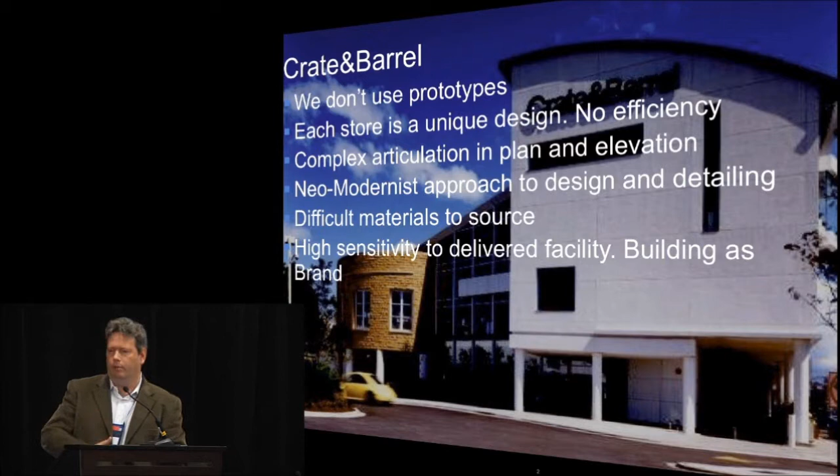A little bit about how we build. If you looked at us as retailers, we probably have the most bizarre way of building buildings. We don't use prototypes. Every building is completely unique. Most of that's due to the real estate that we get from developers. Hard good retailers like us don't generate a lot of rent compared to apparel or electronics. So they tend to give us the vestiges of leftover land in malls, and we have to make them work. You know, sow's ears into silk purses. It's very hard. Each building is sort of inefficient in that respect compared to a Walmart or a Target where you can repeat buildings and make them more efficient.

They're also very articulated. We like buildings that are very dynamic, very gestural. We think it complements the merchandise that we sell and creates an iconic building in the area that we're placing it. They're also very neo-modern. They don't have a lot of moldings. They have a lot of reveals. That's very hard to build because molding hides a lot of error. We have a lot of reveals that express error sometimes.

And they're very difficult materials to source for us. We use custom stone. We use special wood that comes out of British Columbia. We use wood that comes out of New Zealand. So sometimes just getting the bulk of the material to the project site is probably our hardest effort.

And our employees and our ownership are very, very sensitive to the building. They consider the building as a marquee to the brand. We have people at Crate that feel you should be able to take the sign off the building, and customers will still recognize the building as a Crate and Barrel building. I'm not sure I always agree with that, but it shows the level to which we take pride in our facilities. I'll show you a couple of pictures.

We do a lot of 2-story buildings. You'll see a lot of angles, a lot of curtain wall. We've done some historic adaptations in New York City, Boston, and San Francisco that require a very different sort of expression.

This is our only concrete building, built in 2000 in Tyson's Corner. We learned a big lesson from concrete, which is it's not very forgiving. And in retail, we like to change our minds a lot, we're like squirrels crossing the road. So we decided to go back to steel, and since then we've only built out of steel.

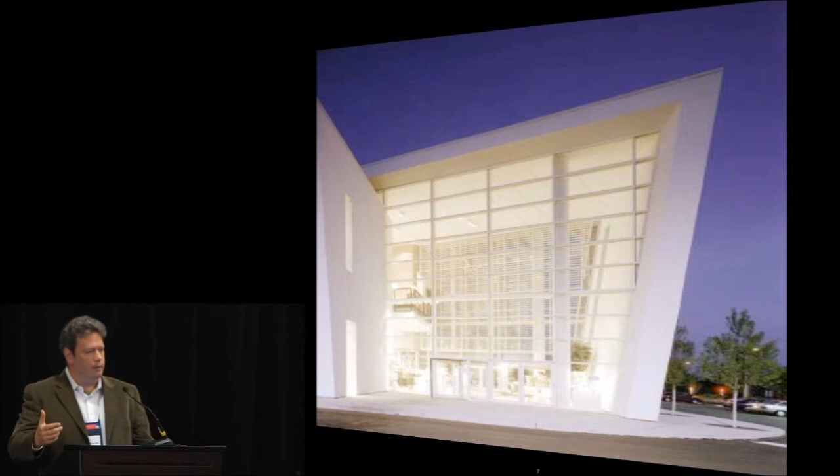Another thing that's unique about us is the amount of light that we use. We have over a mile of track lighting in every Crate and Barrel, and we burn over 1,000 lamps in that track, and we move them around constantly. It's like a little theater inside the store because we refresh the product 4 times a year. We move it around; it's not a static operation like a drugstore or grocery store. So we need a facility with a lot of light, a lot of theater.

That creates a lot of heat. Lighting in a typical building is about 20% of your heat load. In a Crate and Barrel, it's 60%. So we have the lighting system and the mechanical system actually of a small museum.

And that has a huge impact on structure, because structure's coming down, ceilings are going up, so the coordination of everything above the ceiling is tremendously complicated for us. And we just sell spoons and sofas, we're not a museum. So we have economic pressures to do this very efficiently.

To be honest, in the boom years, what we call the golden age, from about the mid-90s until 2008, we could afford to do this. We didn't have to watch our pro forma budgets too carefully. Most retailers were making very good money during those times.

But after Lehman Brothers, we sort of woke up wearing our own barrel, like a lot of us, and we had to rethink things. We were acquired in the mid-90s to early 2000s by a European company out of Hamburg, and they looked at our P&L and our bottom line in late 2008, the end of the golden age, and they said, 'ein Minuten bitte.'

Things are looking not so good, and we're going to give you a survival mandate. So at the beginning of 2009, they said, Crate and Barrel needs to keep growing, it's your main revenue stream for growth, but you can't build buildings like you used to in terms of how you put them together and how you've spent money. In fact, you need to spend 30 to 50% less on a building, and you need to get it to market in about 45% less time because you're taking too long. So they're too expensive and they're too long, but we love the way they look, so keep the same look. And we said, okay.

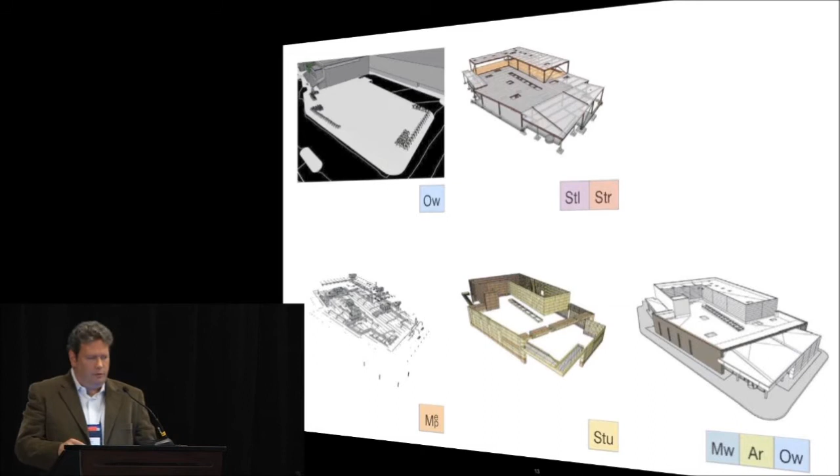And really started leveraging the use of models. This is a current example of stores we're doing now from 2010, in Pittsburgh. Essentially everything's modeled, and I'll show you why in a minute. We've got a design build model at the upper right for concrete, steel, deck. Civil engineering and landscape models at the upper left, MEP models at the lower left, prefabricated walls in the middle, and what we call a design intent model at the lower right. We did this because we realized from about 2000 forward that there was value in modeling.

Modeling prevented error. It prevented our error. That was the first thing we realized, was that when we modeled things as the designers of the store, we caught error. We caught things we didn't realize. It was much better than catching it in the field later and spending hundreds of thousands of dollars to correct the design intent. So we were strong believers in modeling to catch errors in design intent.

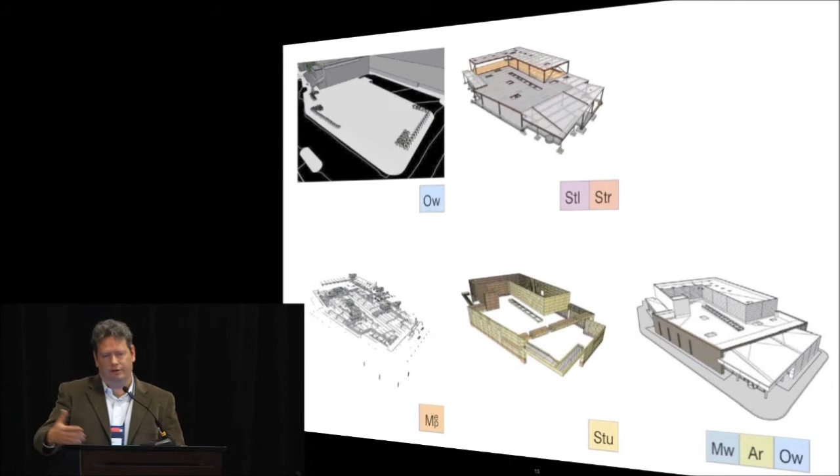We started telegraphing that into construction. Our best example today has been structure.

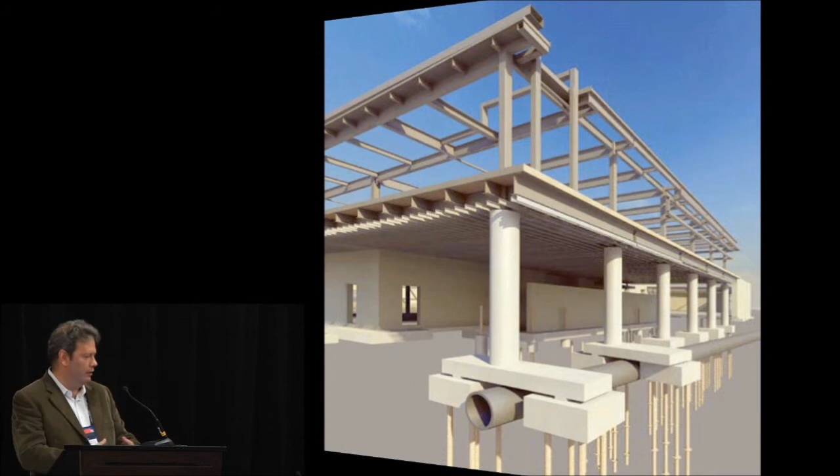This is maybe an over-rendered picture of common structure for us on a building. You can see the level of detail is probably about an LOD of 300, approaching 400. This is the fabricator's model and the engineer's model superimposed. They work together in Tekla. They've modeled the structure and part of the foundations, and an existing condition we had to span over, which was a 36-inch sewer pipe. Moving it would have really broken the deal, so we had to create a novel little solution to span over it.

The level of detail that our models have hit now at the design levels is pretty interesting. We realized we were losing value, spending extra money putting in detail late in phase. If you look at this example, you can see the gusset plate at the lateral load brace, upper left. That impacts us sometimes, and the gusset plate's not shown in the engineering model. It's shown in the fabricator's model, but we may not catch that. In this case, there was a curtain wall window projected for that corner. We would have missed the gusset plate in design, but since we're using a very high level of design definition early in our design process, we're able to catch it.

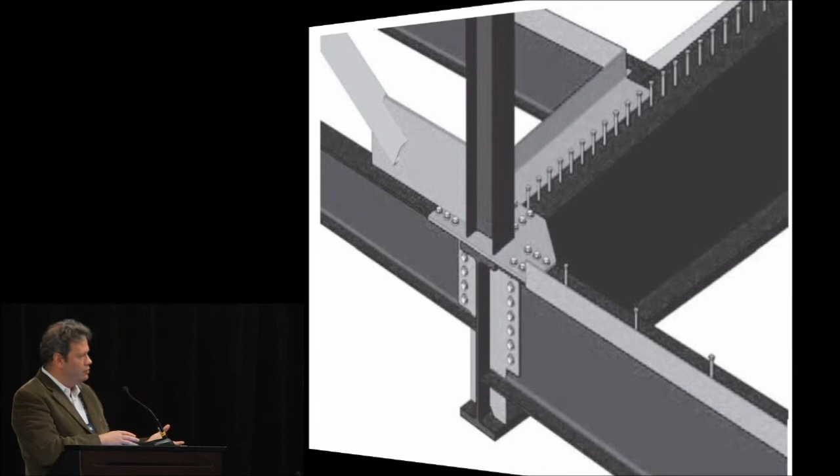So you had to find engineers that would use Tekla at a fabrication level of detail early on. That's kind of tricky to do, but it's been very, very successful for us. The savings is that with the right partnership of engineers and fabricators, you're not duplicating model time. What we realized in '06 and '07 was that we had an engineer doing great work in Revit, very good modeling, but it wasn't interoperable with Tekla. So the detailer was having to start all over again in Tekla, and that was about a $50,000 cost to us. Over time, we were able to knit together the structural engineer and the fabricator so that there's not that $50,000 cost of remodeling into Tekla. It's all seamless.

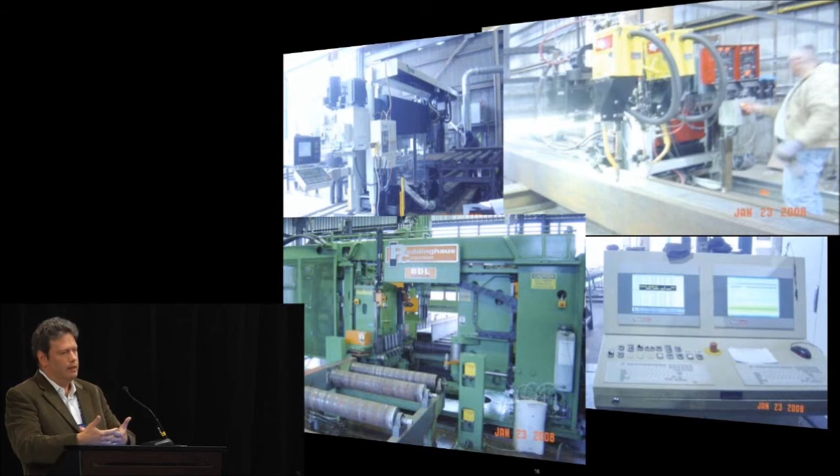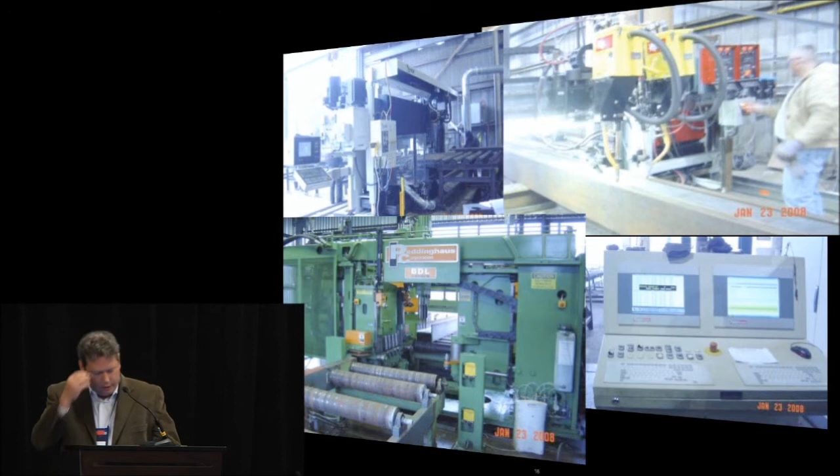We also learned a lot through our relationship with one fabricator in North Carolina about how steel is not only modeled and shown to us in drawings and views, but how it's fabricated. This was very interesting to us as an owner, as a retail owner, because we saw the potential for a lot of waste. We started to understand that despite these pictures and what you see, steel fabrication has a lot of manual process to it.

Adding clips and angles is done by welders on the shop floor. And when you change something, the risk of them getting the wrong information at the wrong time is extremely high.

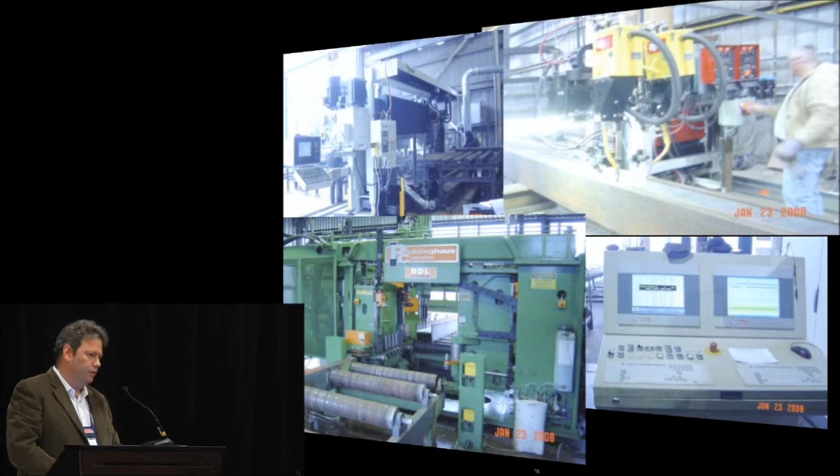We actually took all of our project managers at Crate, all of our internal architects at Crate, and our outside architects and engineers, and over about 10 trips to Charlotte, walked these lines and understood how steel flows from the flatbed rail car to the truck after it's been primed. And really developed not only a respect for it, but an understanding of when we can save time without spending additional money.

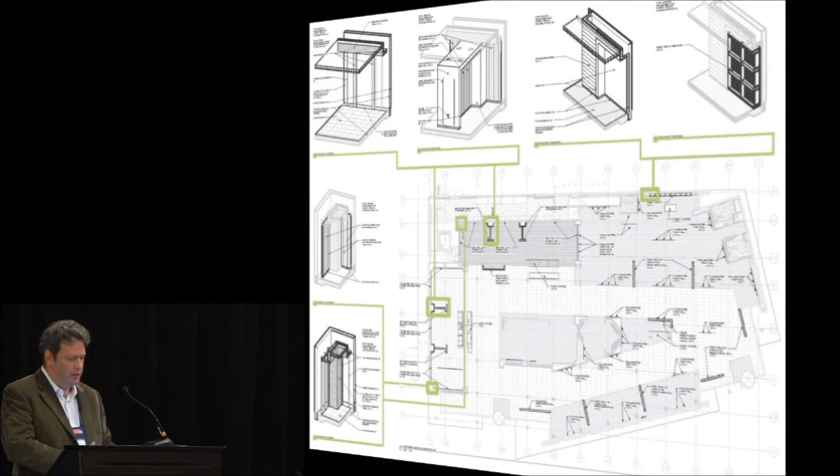So we learned a lot in our experience with Tekla and steel, which really started in about 2003, dabbling, and we kicked it into high gear in '08. Learned a lot and developed a lot of confidence with models.

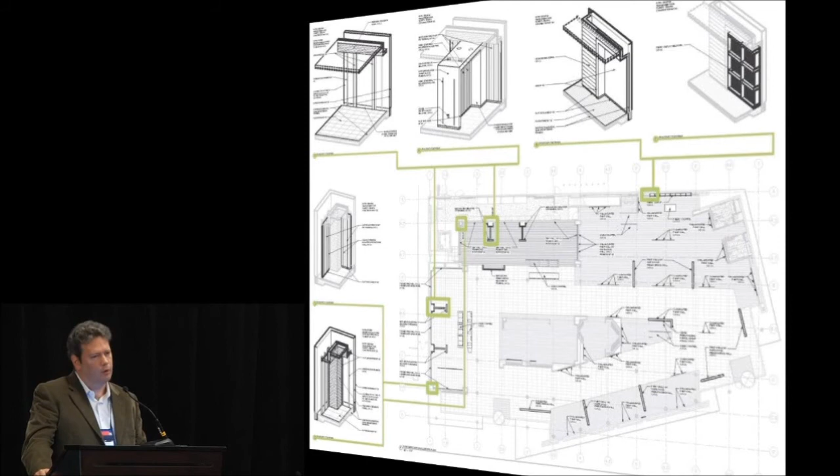We took this confidence into other areas like drywall, and these are drawings of our interior store fixtures that for 30 years have been built out of some tube steel provided by Division 5, some drywall studs and drywall provided by Division 9, and finished carpentry provided by Division 6. So you have three major subtrades all working on site to build this fairly small little wall.

We realized, well, if we can build structural frames with very little error anymore using the Tekla approach, why can't we do the same with interior drywall? And we started pulling these parts of the building out and designed them very, very accurately with this nuts and bolts approach that we've seen Tekla detailers do, and turn them into fixtures.

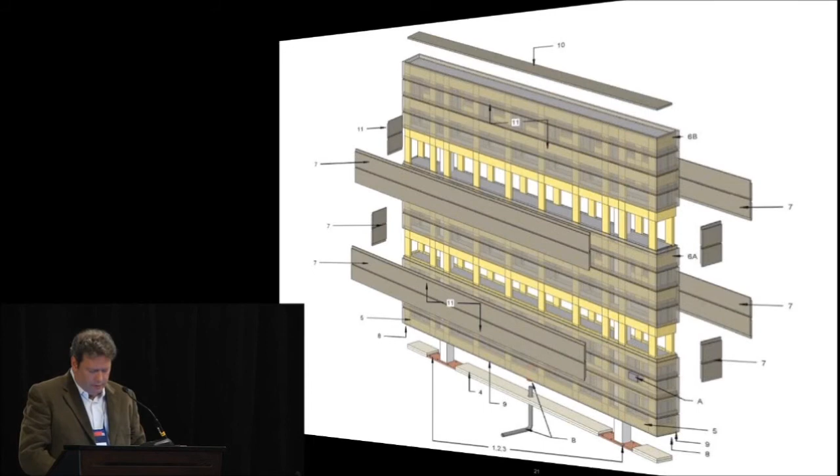So this is just sort of stick built construction like you would see in this room, but we found fabricators who were used to building cosmetics cases and display cases for other retailers, and we asked them just to build walls for us, but use this level of detailing, right down to the screw, and actually designed prefabricated modular electrical systems as well.

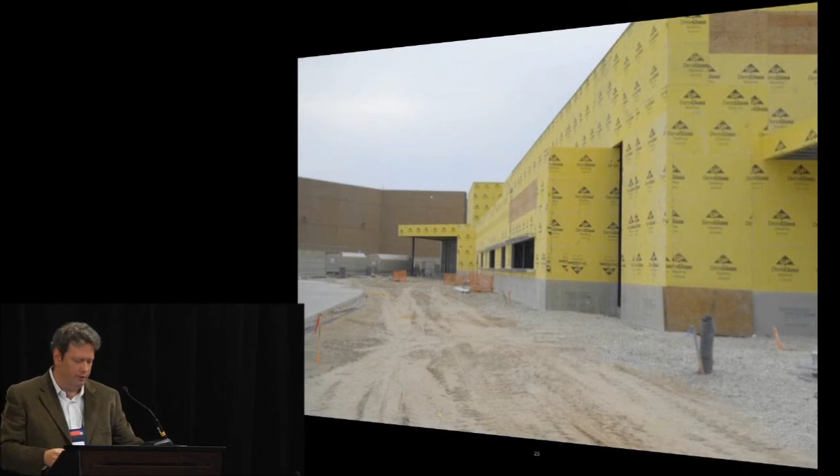And the contractor who's following our prefabricator here has to clad these panels. He has to put all the exterior materials on them. He didn't think we would finish in 5 days. We said it would take 5 days. It took 5 days. And as you notice, he's not mobilized. So when I saw this picture from the project webcam, I was actually kind of sad that we weren't mobilized on site, but I also was very happy that we had made our schedule.

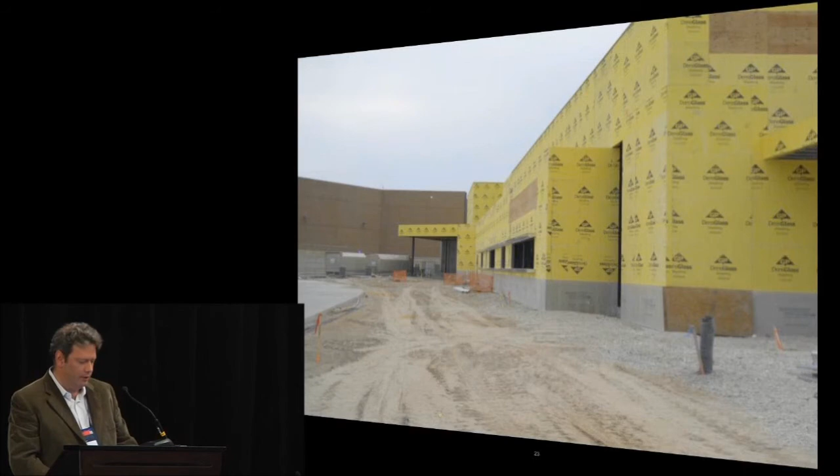It's something to study, though, with prefabrication, because it's a logistics puzzle that is trickier to achieve than it appears. So we actually had to speed him up a little bit.

These wall panels are very interesting. The technology, where it's headed, is fascinating. Several years ago, we saw panels being fabricated by studs, where people would buy studs from Dietrich or Marino Ware, and they'd just build them in a garage, and that was the idea of prefab. Well, it was just stick building in a building and towing it to the site, really. It didn't have a manufacturing logic to it.

And now what we see with prefabricators is they simply buy coil stock, and they basically roll their own studs, roll their own pieces, all coming out of this sort of Tekla-based model that's very, very accurate in terms of piece count. Their waste factor is less than 1%.

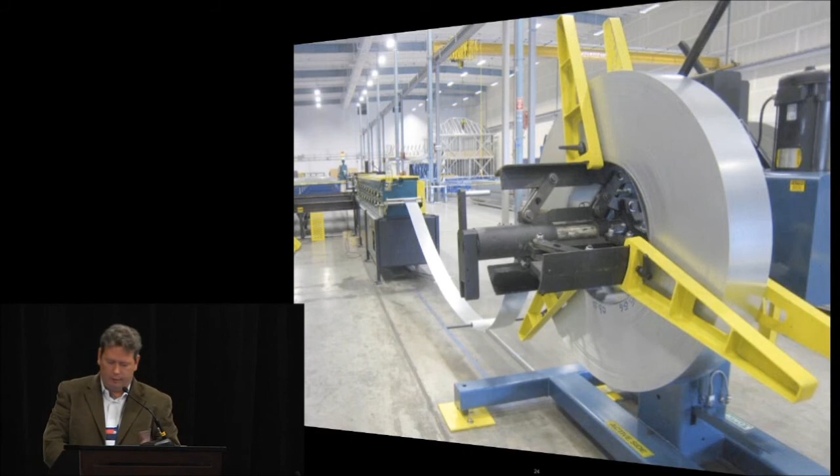Compared to typical stud framing, it drives me bonkers when I go to job sites that we're not prefabbing, and you count the number of dumpster hauls we've made just throwing scrap material away, compared to this process where there's very little to no waste. It's assembled in a factory, very controlled conditions. Workers don't have to wait for a lift, they don't have to find material, they're not asking answers for an RFI.

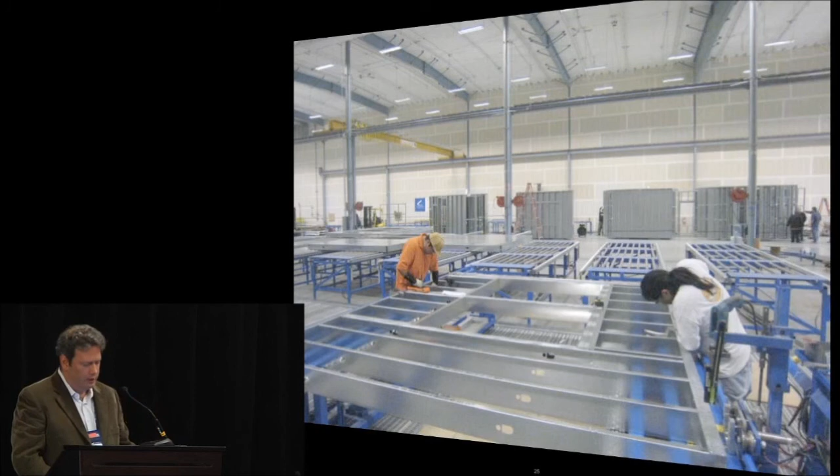The 3 big reasons 30% of every dollar is wasted on a job site. And at the end, you can put them on a nice high cube truck, very dense pack, so it's very efficient to ship, and it fits nicely.

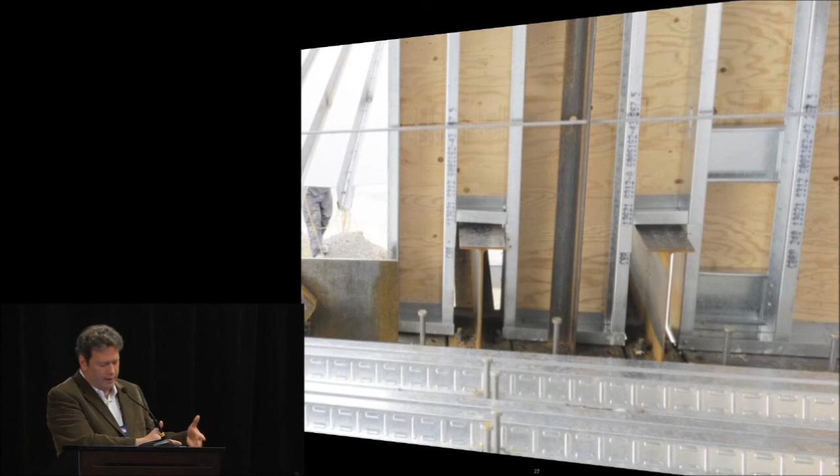I love this picture because it's got an excellent stud panel model. We had an excellent Tekla steel model, and look at how that panel was sawtooth to fit around those 2 beams. They dropped it into place and it fit. I wanted to see this - I let my project managers go to the job site more than I do, but I went to this job site just to see this panel fit. They didn't know I was going to just show up, and I took this picture as sort of proof of concept that when you're using good modeling, have a good team, and believe in it, you can achieve this sort of precision.

The team took it to another level where we were looking at our concrete costs, and a typical slab, 29,000 square foot slab on ground, was costing us about $400,000 to place. We talked to the construction managers about this cost and realized a lot of the cost is in form labor for the slab. You have to form the edges of the slab and then pour the concrete. That's a questionable value when you think about it, because you're placing forms, then pouring the concrete, and then you have to take the forms out. You could just call it a high transaction cost.

Then we realized, well, we've already prefabbed the walls, and the walls are following the same profile as the slab. So why don't we borrow a technique from tilt wall and extend the lower section of the wall panel down to a kind of a lean mud mat, something very simple, quick to install, and let the prefabricated wall panels form the concrete. We've done this on 4 projects so far and are trying to patent it at this point. We cut our concrete costs by almost 60% because we took out most of the labor. There's still a little bit of form labor to do where we don't have those walls, but most of it's been eliminated.

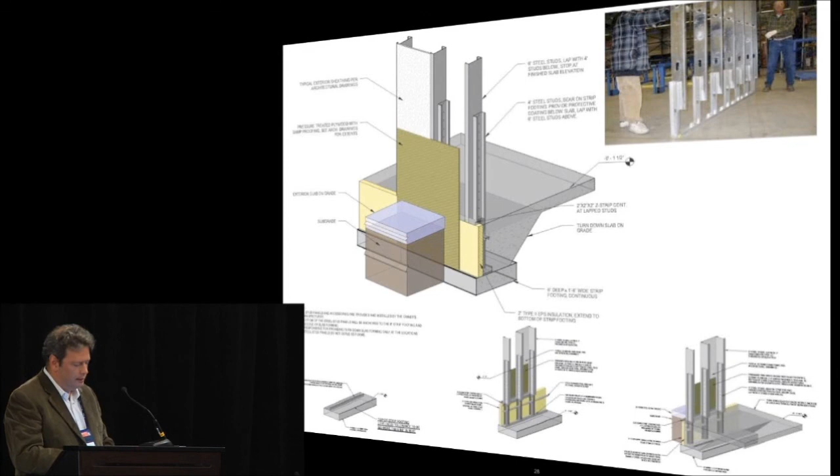We also had the same impact on schedules. Remember, our owners were really after the schedule aspect of things, and pre-Tekla, a building from beginning to end took 88 weeks to produce - that's the design, the procurement, the building, and the commissioning. In 2010, we had that dropped to 56 weeks. In 2011, we've dropped it to 32 weeks so far, just by mining more of that time out of the process.